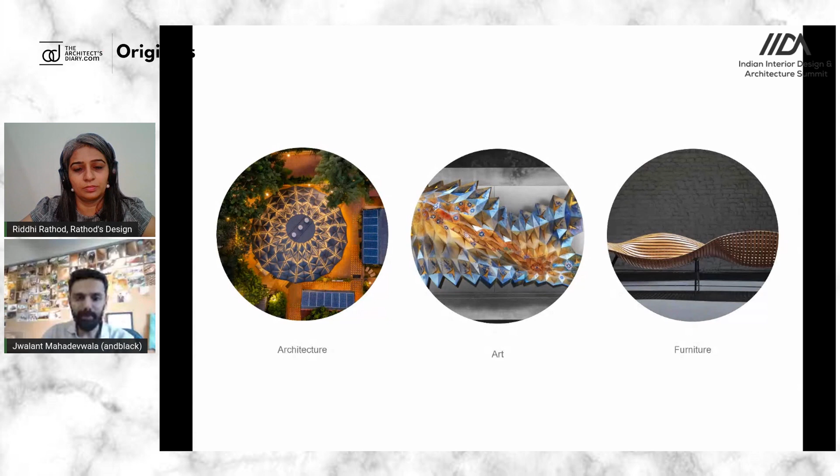Yes, thanks a lot. Now, andblack Design Studio is a 10-year-old design practice based out of Ahmedabad in India. And we focus on a very transdisciplinary kind of a practice. We do architecture, art, furniture, and interior designing. Mainly, obviously, we do focus on architecture, but because of love for technology and complexity, or let's say things which we want to experiment with, art and furniture has become quite an important part of andblack over the last few years.

Some of the projects which I take you through today are just some examples of where we have faced challenges, but more than facing challenges, we have had to innovate certain systems and techniques and explore ways to do these complex forms and buildings within the context of India. Most of the technology and things which are available within the Western environment of construction are not really very easily available within India.

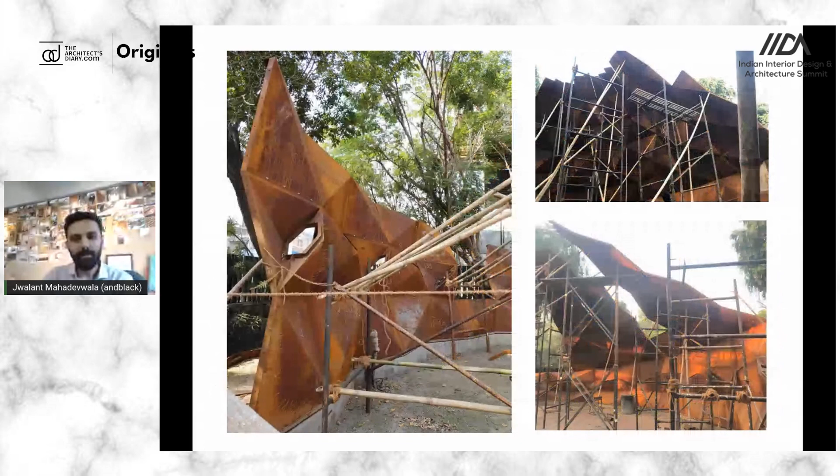This is a project which is a gallery, a transportable gallery, which came to us about 4 years back, and it embodies a lot of technological advancement within the ecosystem which we have in Ahmedabad. Now, the entire structure had to be possible to flat pack and move to a different location. Now, to do that, we had to first challenge: do we need a foundation? What kind of material do we use? What kind of structural system do we use?

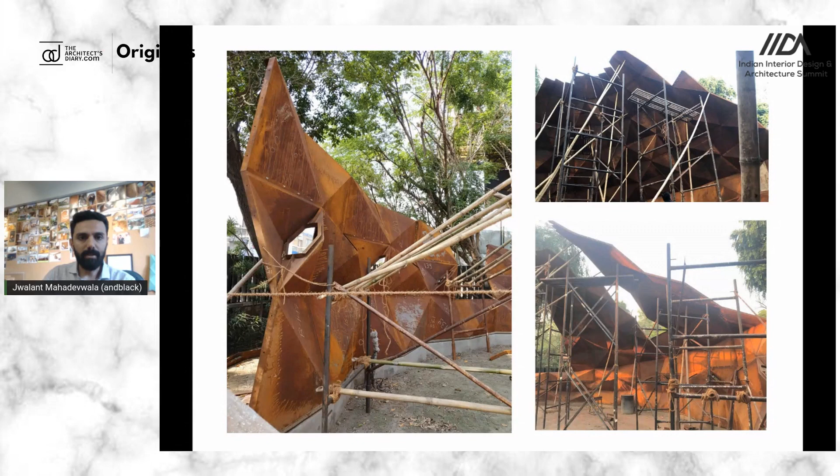So, having worked with multiple scenarios within a digital platform, we came up with an idea of a folded plate, which is 1 mm mild steel plate, which folds and creates a structure within a module. That module is basically repeated along a conical form, and that becomes our structure. So it's literally a puzzle which you put together, which could be flat packed and moved to a different location. This is the final output which we have got for 11-meter size of this dome.

Now, what happened while designing this project was that we pushed ourselves not to design a final product. We pushed ourselves to keep continuing designing the process. So today, after having completed this project, we can make these 1 mm mild steel plates converted into a much bigger size gallery. Now this size of the gallery, a footprint we got about 11 meters roughly in diameter. We can stretch it up to 18 meters with the same material thickness. We can go even beyond that, but then the engineering would change a little bit.

So this was a very interesting project for us, because it was very challenging to mix technology, which would be a digital form of designing and structural evaluation, then metal cutting, which would be a laser cutting, but a lot of bending started to happen by hand, because there are limitations within the construction industry to use CNC bending to certain things. Even after CNC bending, the welding, even 1 mm sheets are not something which is used within the industry. So it became a very interesting and an uplifting environment for everybody who was working within the project.

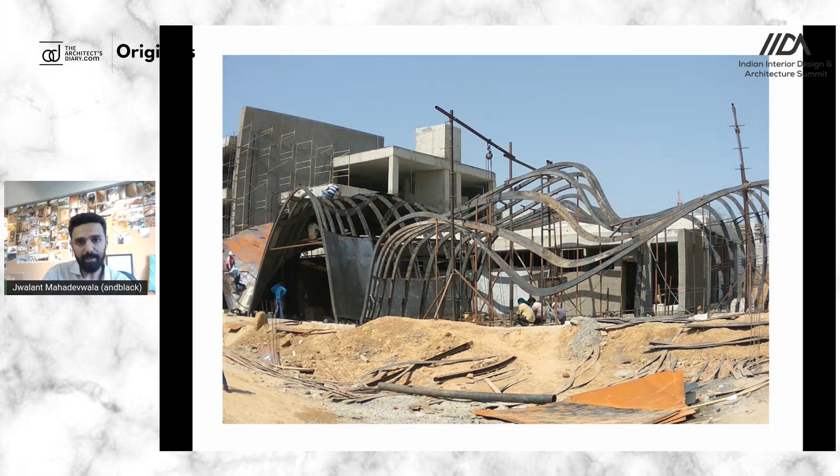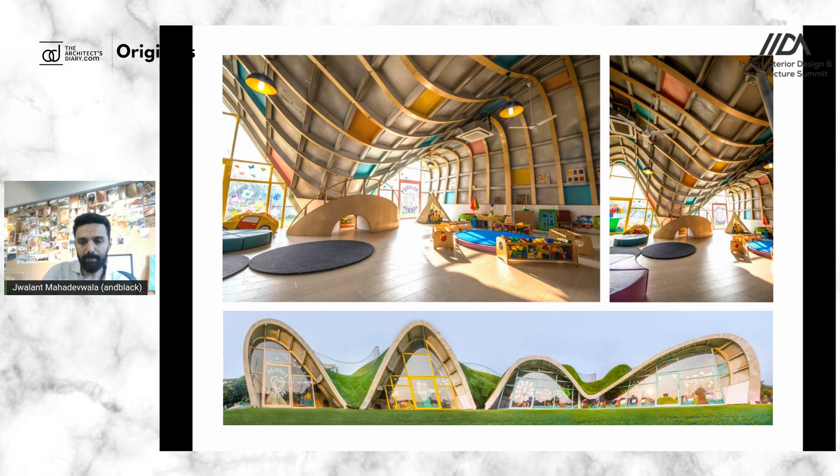So the metal frames came in, then the sheets, the insulation, and all of them came into being, and it turns from a product, or from something which was very machine cut, to a space which comes alive. So there are these two large spaces in the building for pre-primary schools. So from here, if you see the bottom image, it is from where kids could go up and use it as an undulating landscape or garden, and then underneath you have this very interesting space for them to interact.

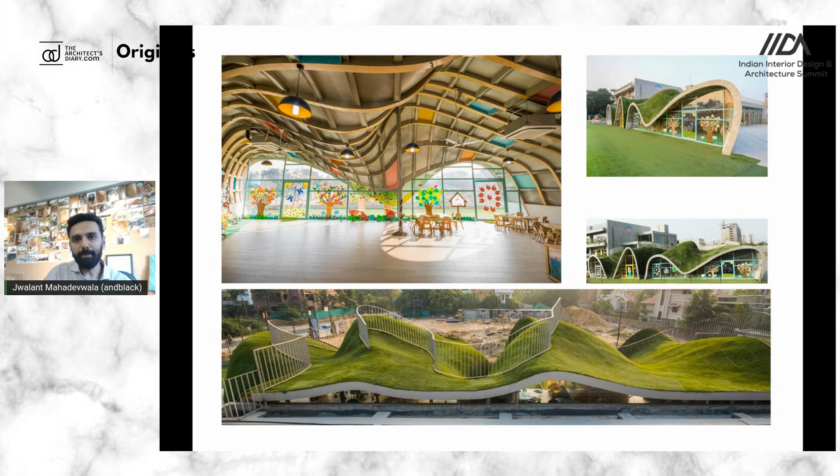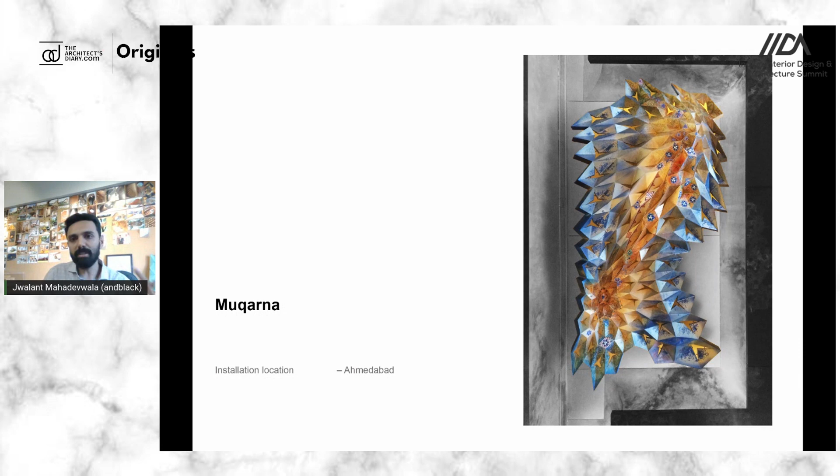Moving between architecture, art, or design installations, and somewhere we are in between that, came very, very handy for us to experiment with technology at a scale which was manageable. So before I did the two projects, I was lucky to get a chance to work with much smaller scale things to explore and develop my team. One is obviously within our studio, and one which is outside our studio, like carpenters and fabricators who could start to understand my design language.

And when this came to us, we designed it and everything worked very well. And when it came to fabricating it, we thought, okay, we'll just CNC it. And then it struck me that what I did in London was something where India will take at least 10, 15 years to be there.

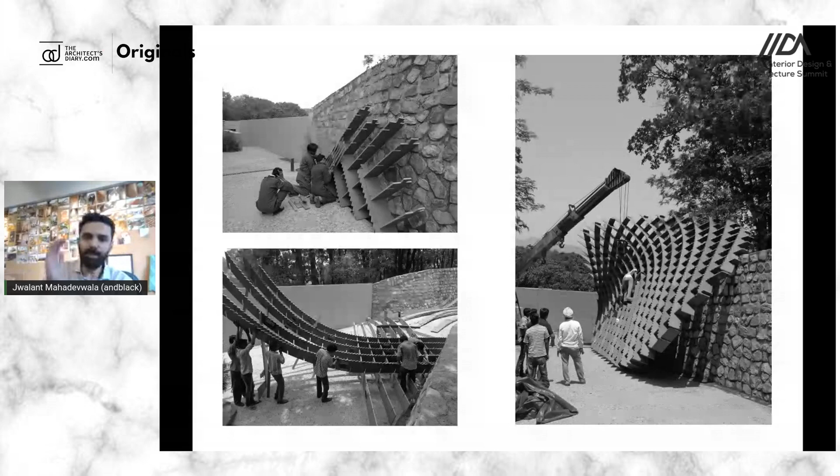Now, coming to a next project, which is again an installation. We had a very, very interesting brief, where in a resort in Dehradun, we had to hide a building which was coming up on a plot adjacent to the resort, and we couldn't hide it because it was a 10-feet structure. So we had to develop a form which can be right at your eye view, or which kind of hides your viewpoint and hides the building. So we came up with a leaf form within that context of a resort and the greens.

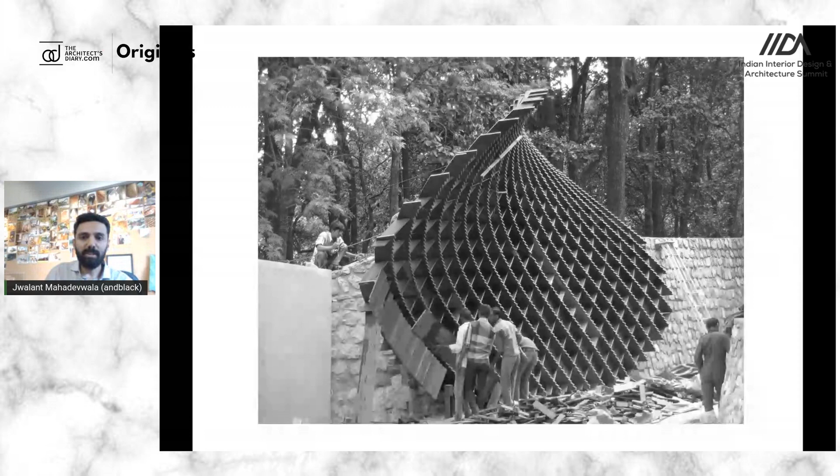And again, you see here, the things are cut with CNC, but then carpenters are doing the work on site, managing certain minor things, which is very important to work with, and then cladded the entire thing with wooden panel. So now it's a curved surface cladded with flat reclaimed teak wood, which are all same in size, and kind of putting together.

So a lot of understanding of what will be required while doing this process came from this understanding of wood, understanding of workmanship, understanding of joineries, which came from the technology which our craftsmen use. So here you can literally see a skin which is behind, which is a structure which is purely CNC, and a skin which is in front, which is wood, which is a piece of craft.

The same technique we used in another project of ours, because it was so exciting to work with a curved surface and a flat module, that we wanted to take it further into another material and then have a little bit more of work. So we had designed a screen in Ahmedabad, where the idea of the screen was to imbibe the patterns in there. There is a very famous jali in Ahmedabad called Siddhi Sayyad Jali, and it's a beautiful tree of life pattern. And so you see here, there is this tree of life.

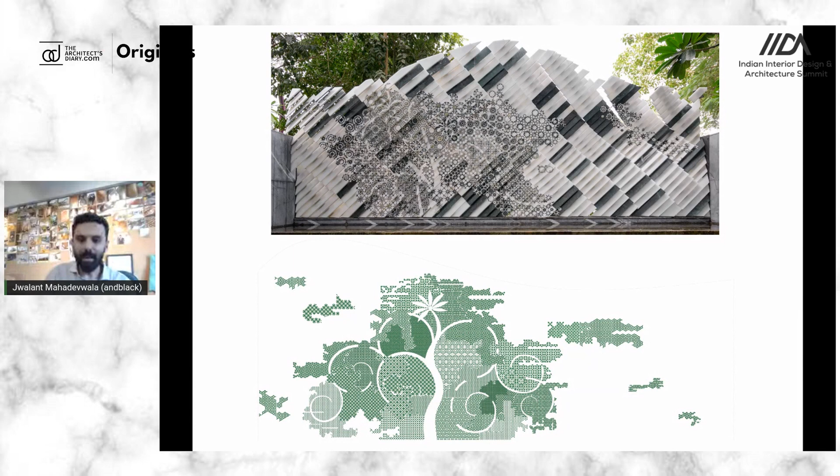So this central form is taken from the Siddhi Sayyad Jali, but then we transform that form into a geometrical changing pattern, which was then projected onto each piece of marble, which was then handcrafted and inlaid. So it's a coming together of a very complex form made out of modules.

And each module, I don't know how many people have worked on this, but when the entire thing comes together, it just fits in as a puzzle, and that creates something which is quite wonderful, and for me, a really happy moment, because till then we don't know if everything will fit. Even if one person has made a mistake, everything will just fall apart.

So here again, the technology used is very diverse, from hand inlay work with obviously using some bit of machines, to a CNC cut, laser cut metal structure which is behind, which holds the entire screen together.

This project is a very structurally challenging project for us, because we were devising a screen which doesn't have a static structure behind. So every plate is connected to another plate which is disjointed, and every angle, every distance from one plate to another plate was different. And this was a challenge which we took, because I was always fascinated: what if we create a skin where it doesn't really have a structure behind, but it's kind of connected with each other separately.

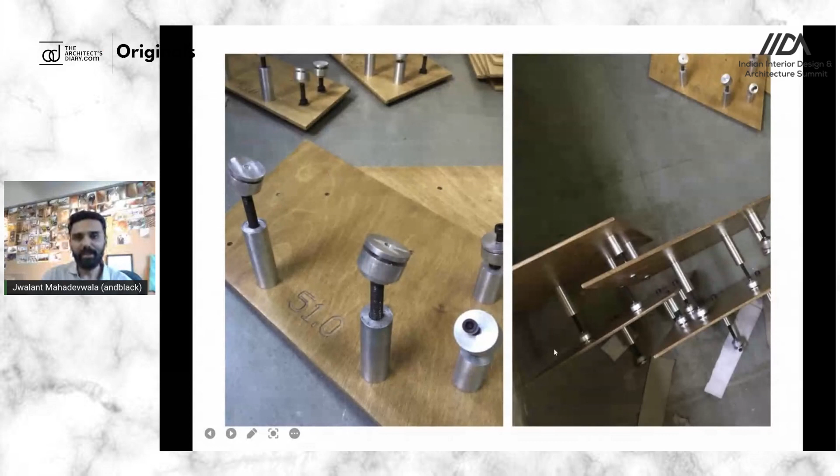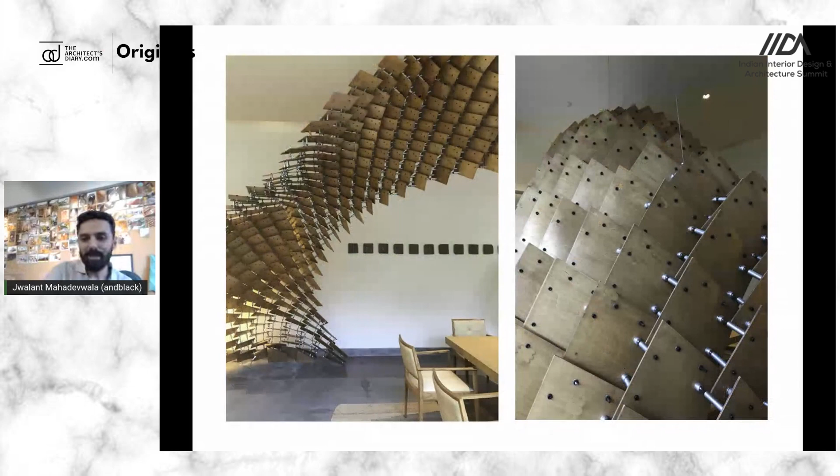So this is how our work looks in the background, where there are numbers, and there are these structures behind, and there is, you know, a sleep deprived intern or an architect or myself sitting there and trying to figure out with the craftsman how to put this entire geometry and complexity together. So this is how the entire screen then comes together as a form of art, as a form of design.

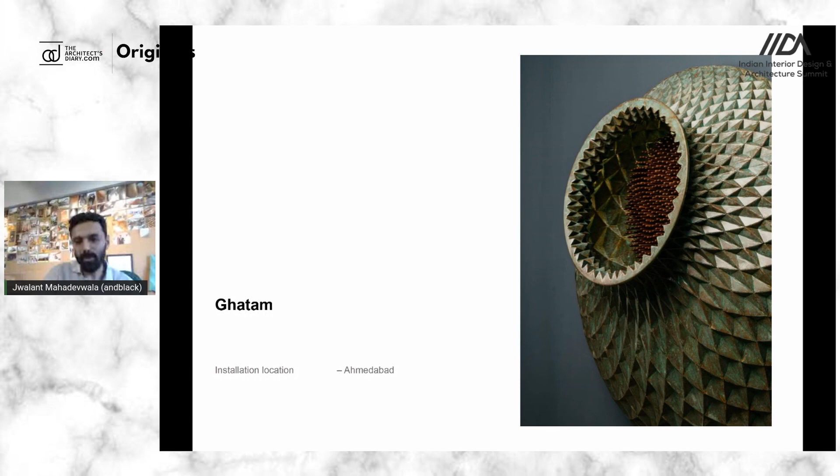From this, what started to happen is that we wanted to challenge ourselves further, and we wanted to bring in kinetic movements into our work. This is an artwork which is called a ghatam. A ghatam means a pot, and we developed a pot which was breathing in the sense that it feeds us. So there was an entire story behind it, that we breathe because we eat, and that's how we grow and we breathe. The entire structure was made out of brass, which was then patinized.

So here you can see laser cut triangles, again each one of a different size, being put together in a workshop by our fabricators. It's a 6 feet diameter three-dimensional artwork where I'll share the video where the central portion, which is made out of wood, moves very very softly to breathe. So I'll just keep it on for a few seconds. So if you focus on the central part, you will see a movement which is very very soft.

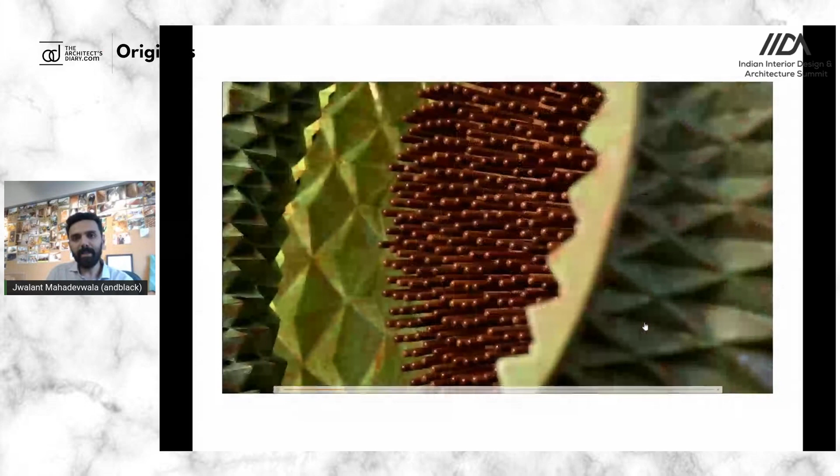So from just being parametric in the manner of a static system, we started to become quite interested in what happens when it becomes kinetic. We have used the services of Studio Motion Works. They do a lot of kinetic artwork. So for most of our kinetic works we collaborate with them for the back end technology to get that done. I'll move to the next one.

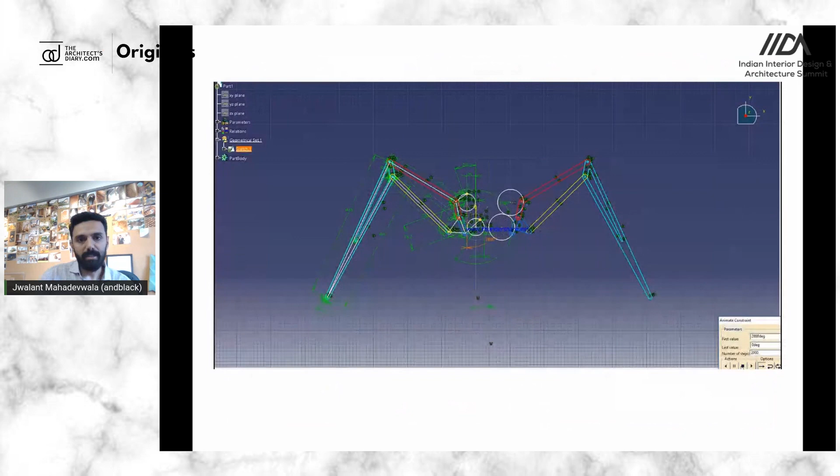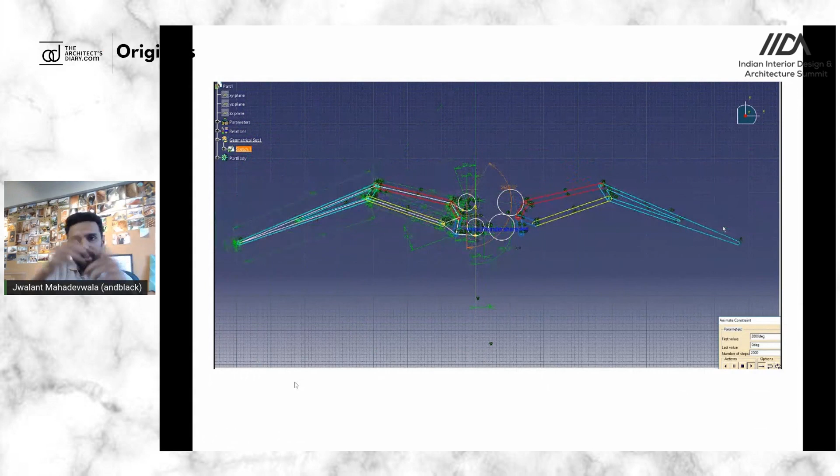And this would be my last piece which I'll show you. It's a kinetic artwork which is called a white peacock. This is installed at the Bombay airport, and it's a life size peacock which was very systematically designed within a digital format to get a wing movement which works as if a bird flies. So it folds when it goes up and then it comes down flat. Now those kind of things would not have been very easily possible without the digital technology which we have today.

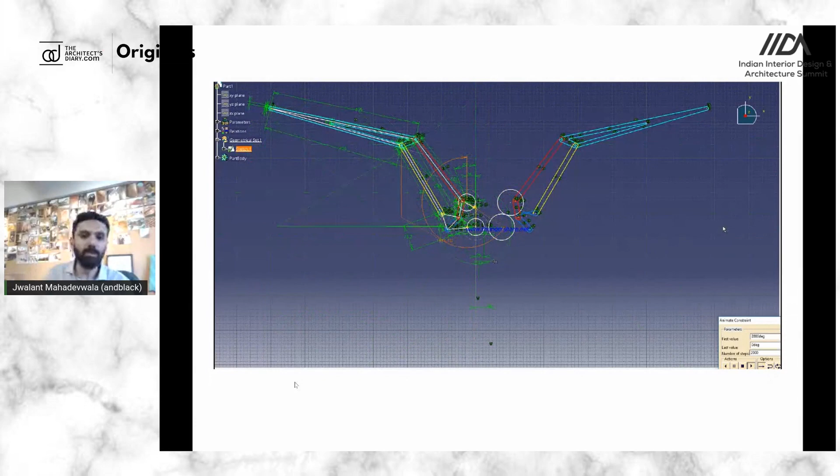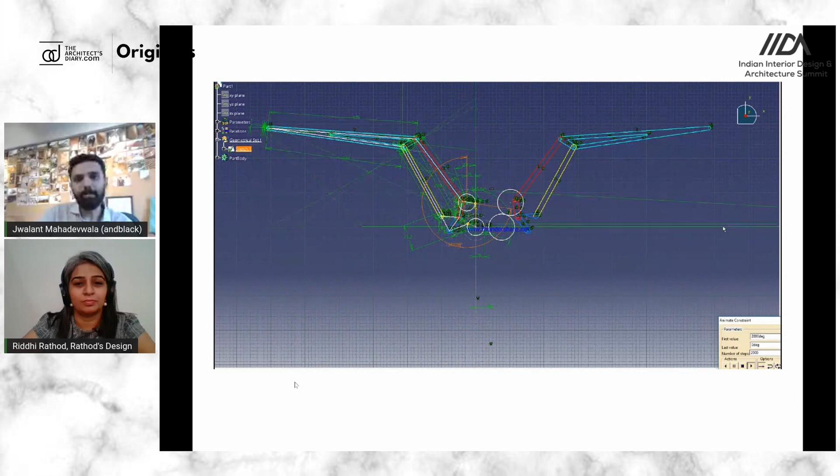Yes, you can even do this by hand, but I actually made 500 iterations of this wing movement just by changing dimensions. If I had to do it by hand, it would have taken me a few months, and I could do this within, let's say, a month's time. So this is how technology helps to speed up the processes which would have otherwise taken a lot of time.

So we have different materials, but each piece was designed using a digital platform, a lot of CNC, but again a lot of handwork has gone into it to put this entire thing together to make the machine work in the right manner. Yeah, thank you.